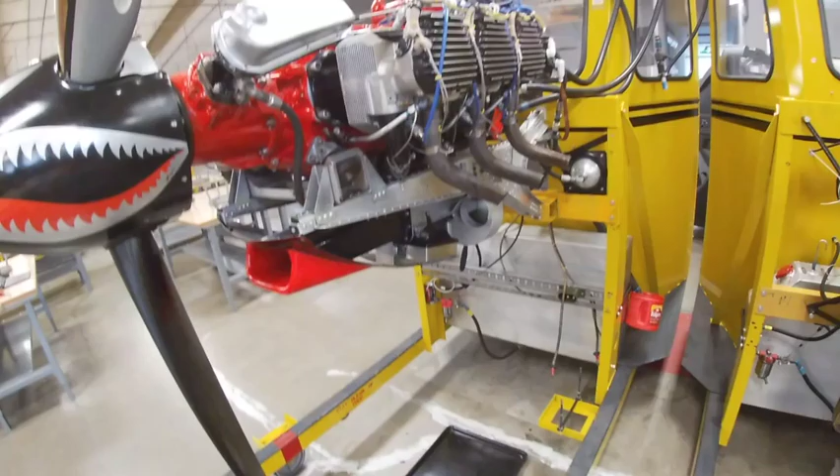Intake systems, you love them or you hate them, or you're indifferent, which I suppose is fine too. We're going to look at two different engines that are approaching the same challenge, but in slightly different ways. We have the O-300 and our IGSO-480. So we'll start over with the IGSO-480. Remember, we have four primary components to any intake system.

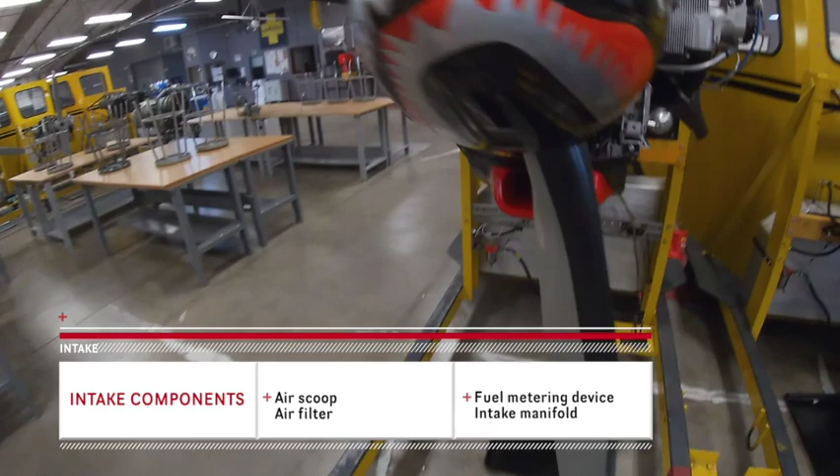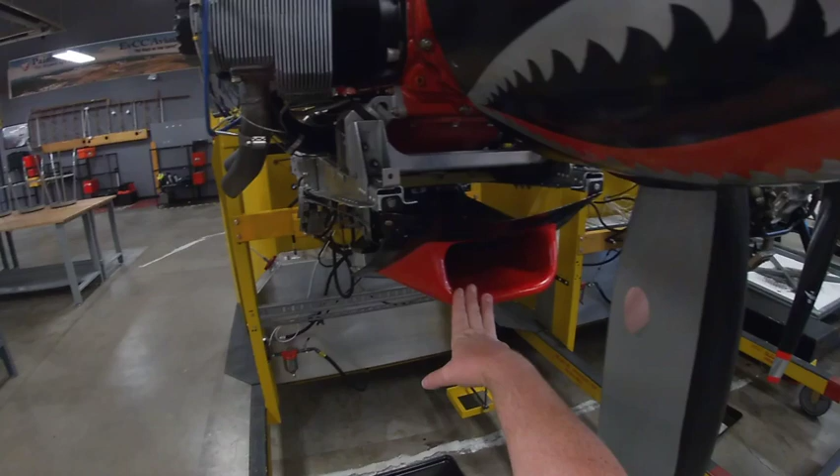We have our air inlet up here, which this one is designed pretty nicely. The shape of this actually allows us to take advantage of ram air when the aircraft is in flight to produce higher intake manifold pressures, which is kind of nice. It's a little bit like boosting without anything that needs to boost. This is supercharged, so it's probably irrelevant anyway, but it's a nicely designed air inlet.

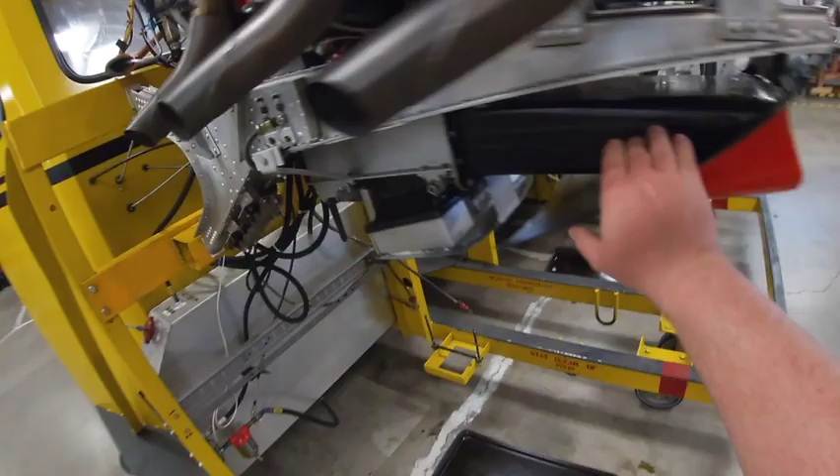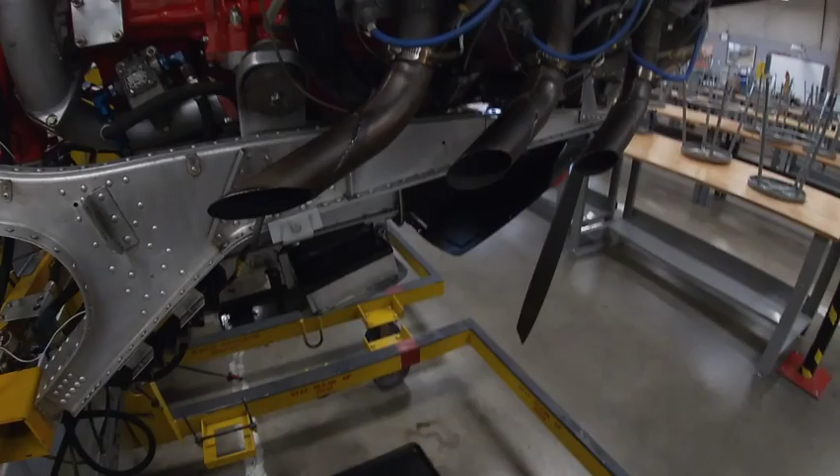And you'll notice as we come down our inlet further back through the trunk here, we're going to come to this bend right here, which goes up to our throttle plate. That throttle plate is going to be the entrance point, technically speaking, to where our intake manifold is. Now, we have a couple different things. We have our air inlet, but we're missing a fuel metering device, and we're also missing an air filter. Well, we know where our intake manifold is, so where are the other two? Well, there's kind of a difference about how they build this engine.

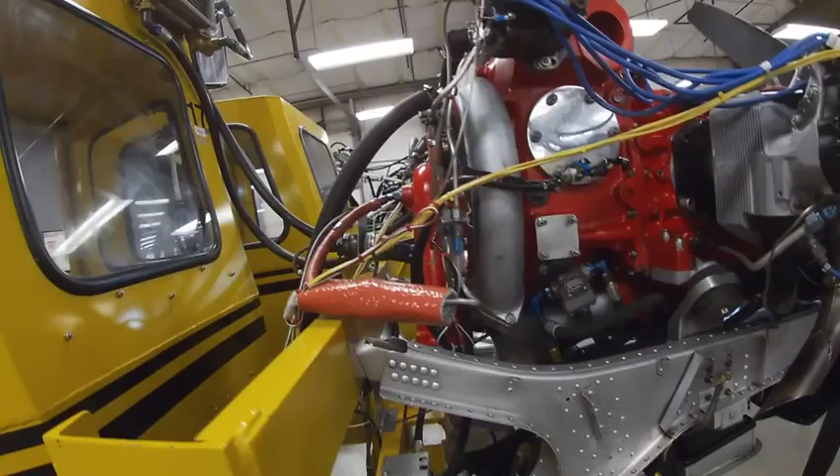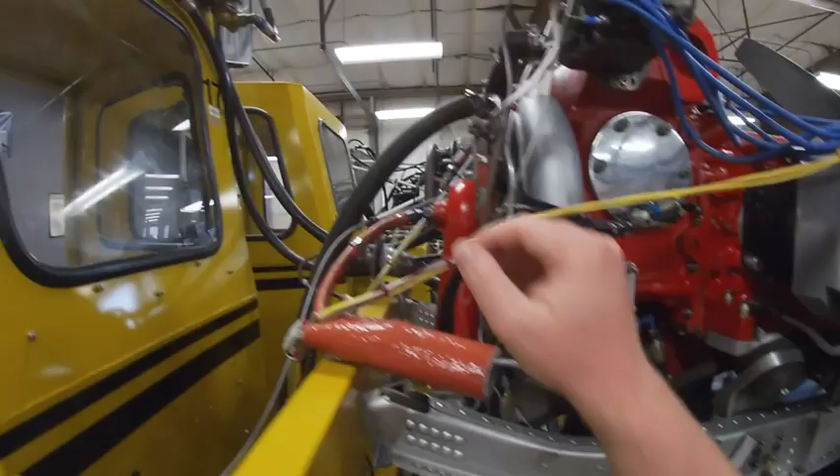So first of all, let's look at fuel distribution or fuel metering device. In this case, we have single point injection through a single injector, which goes into our supercharger section before this gets sent out to our intake manifold, and we have these familiar little 90-degree turn inlet pipes that go to the cylinders. So our fuel metering device is made up of a combination of this injection point along with our fuel servo on the other side that works in conjunction with our throttle plate.

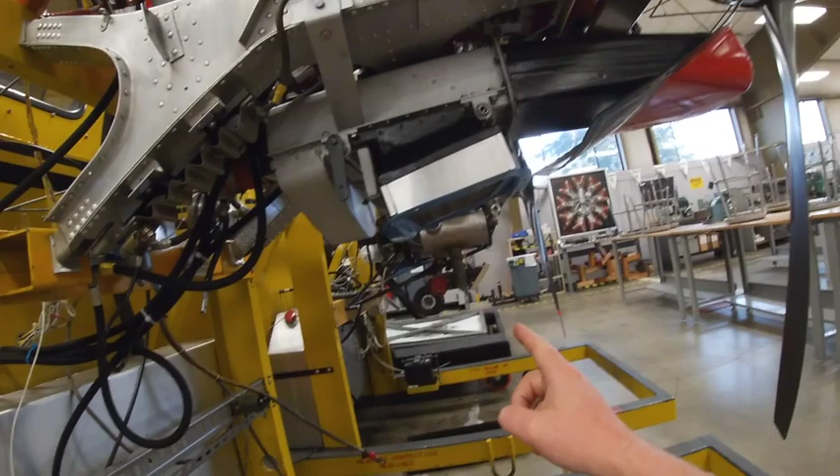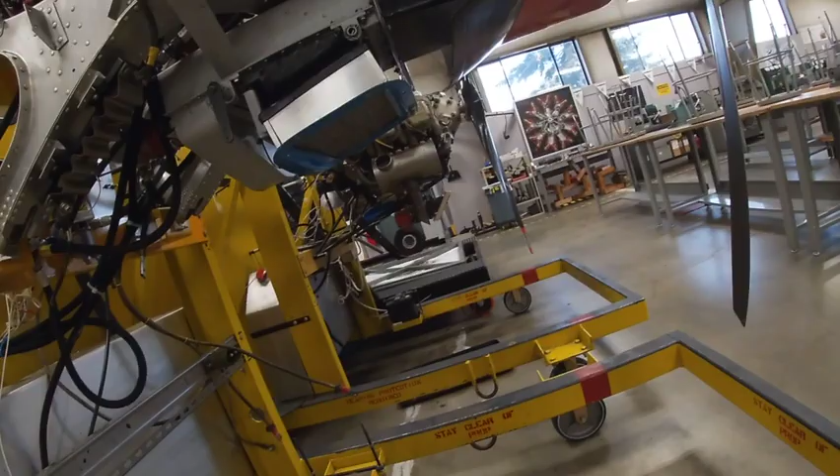Now the filter, this one's kind of tricky. Our filter is actually located right here on the bottom of the engine. And you may be thinking to yourself, well, that's weird. We already have a path going into the engine, so why in the world did they strap an air filter onto the bottom of this trunk? Well, I'll tell you why. Reason being is this does not normally provide filtered air while the aircraft is in flight. Presumably, the reason they've determined that is, well, the aircraft is flying through the air, so there's probably not a lot of dirt and debris and squirrels and other small animals that can get sucked into it when it's at 12,000 feet, so we don't need to worry about it.

So instead, what they've done is they come up with alternate filtered air. All that does is we have a control arm, which is linked up in the cockpit, so when the aircraft is taking off or landing, the pilot has the ability to switch to alternate air, which closes off the duct that's allowing ram air to come in, and instead draws filtered air through the bottom of the trunk and takes it through the rest of the system. That's one way of approaching it. Other nice thing about this is you don't have to really worry about filter ice while you're in flight because, well, there's no filter for what's normally being used in flight.

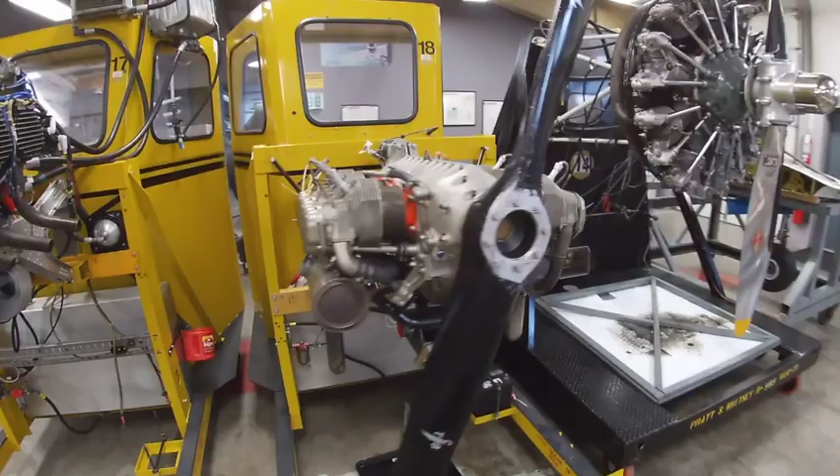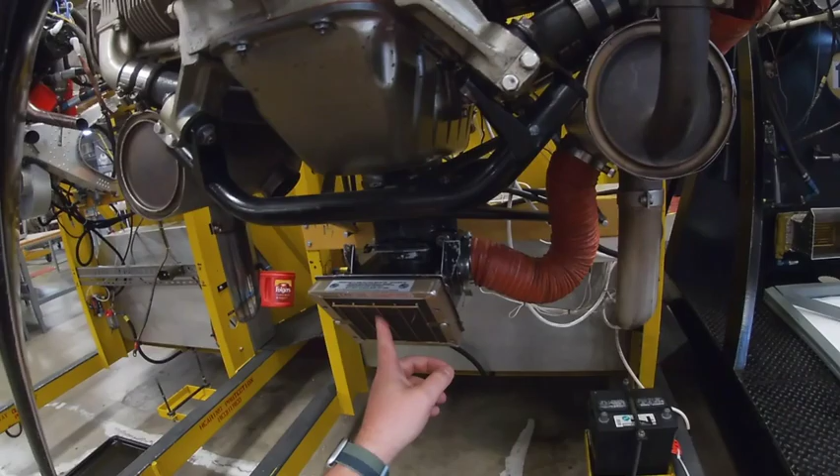Now on the flip side, as we go take a look at the O-300, this is a little bit more simplistic, but maybe in some cases hard to see. So we'll dive in and take a look. First thing to notice right here, we have our air filter right up front. This is a non-serviceable element. A lot of people remember these elements that could be serviced. You'd wash them out, then you'd re-oil them with a special kind of oil. That's not what we're dealing with here. It's not your car's K&N filter. These are designed to be replaced each time.

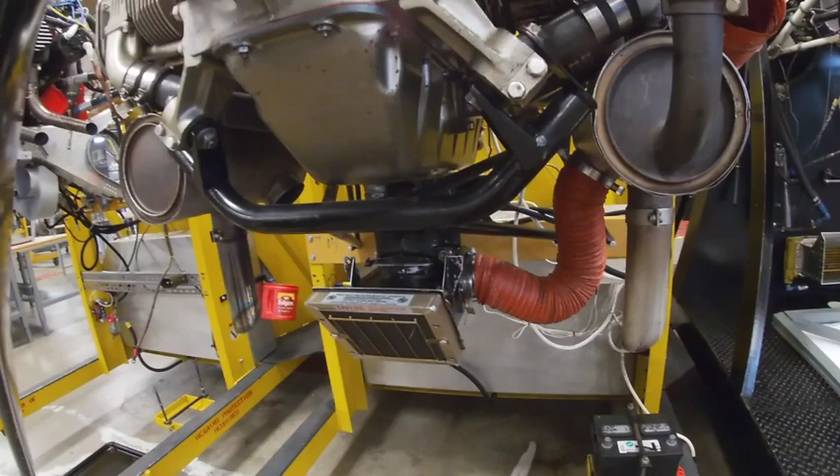Now, on the other hand, we have our carburetor box, which does a couple different jobs. Half of that job is related to carburetor ice, which we'll talk about in a minute here. But we have our carburetor right here, which is our fuel metering device. And you'll notice it's bolted right to the bottom of the oil sump. That can be a little bit confusing because you think, well, where's the intake manifold and why is this going into the oil sump? Well, the reason for that being is we actually have ducting that runs internally as a part of our intake manifold.

So we have our intake manifolds here, which connect to the cylinders. It comes up through a pipe, and it actually allows the warm oil to preheat the charge a little bit. Now, you may be thinking, oh, I thought you were just telling me how great it is to have cold, dense air.

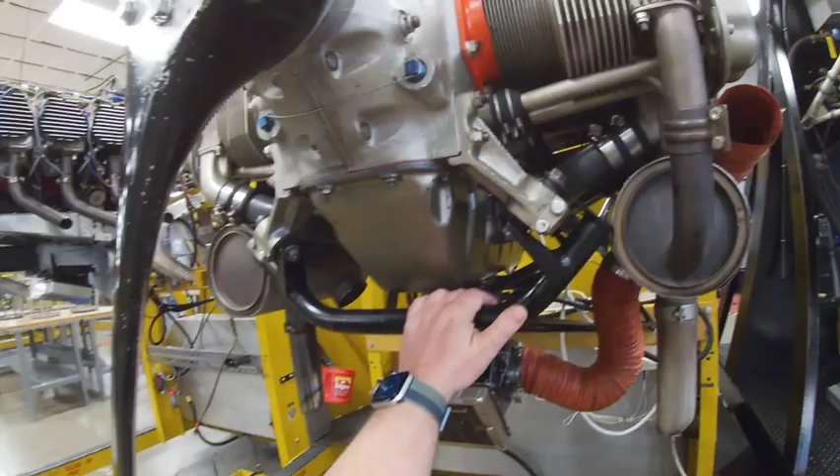Well, that's true. Cold, dense air is still the best thing. However, if it is too cold, then it actually makes it very, very difficult for the fuel coming out of this carburetor to emulsify in the airstream. So as a result, some manufacturers, you'll see this on older airplanes most of the time, will actually run part of the intake system through the oil sump to get some of that extra heat and to help the fuel and air to mix together so we have a nice, easy-to-use charge to promote burning.

And as we get up to our cylinders themselves, you can see that our intake manifold here connects to the cylinder by means of one of these wonderful little intake hoses. These will be the bane of your existence, mostly because of intake leaks. They can be notoriously difficult to get to seat properly to make sure that it's actually not on the wrong place, and they will cause leaks in your inlet all the time. They can be kind of tough to troubleshoot and figure out, so just keep that one in mind.

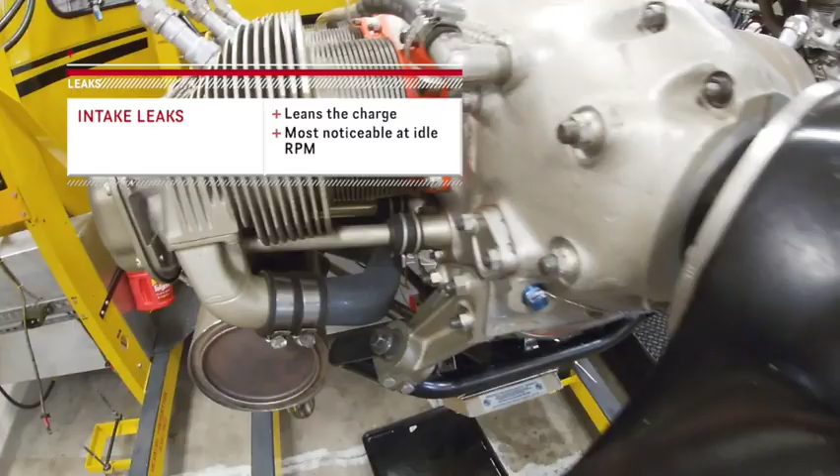Now back to the point about carburetor ice. Now we know that carburetor ice, we have a couple different forms. We can get impact ice that forms on the filter or filter ice, and then we get carburetor ice, which can form in the venturi of the carburetor. Basically, we have cold, moist air that's being taken in through the filter, gets up into a venturi, which drops the temperature further, and we introduce more liquid by means of fuel, which can cause us to start collecting ice. That is usually determined by a loss of performance on the engine itself.

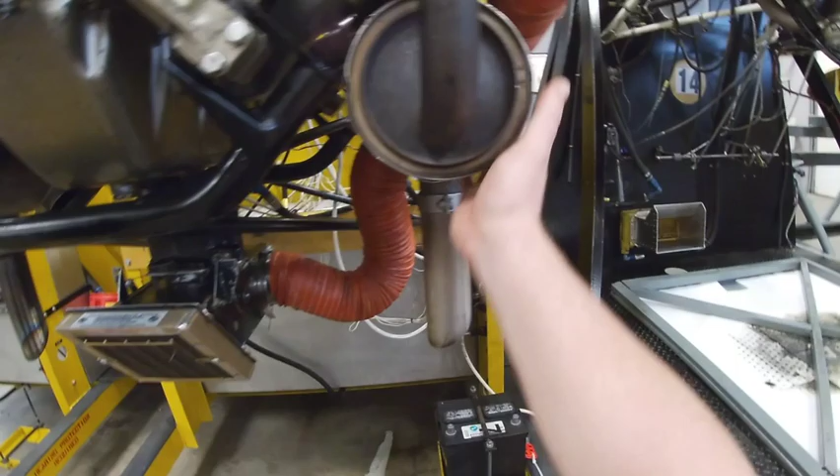So what we have is this little muff that goes around the muffler, and what that does is it draws in fresh air. It's forced around the muffler, and there's all these little fingers sticking out that allow for extra contact area to transfer heat from the muffler inside this muffler jacket or muff that allows the warm air to get warmed up, and it exits through this bit of scat tubing and takes it out to our carburetor box.

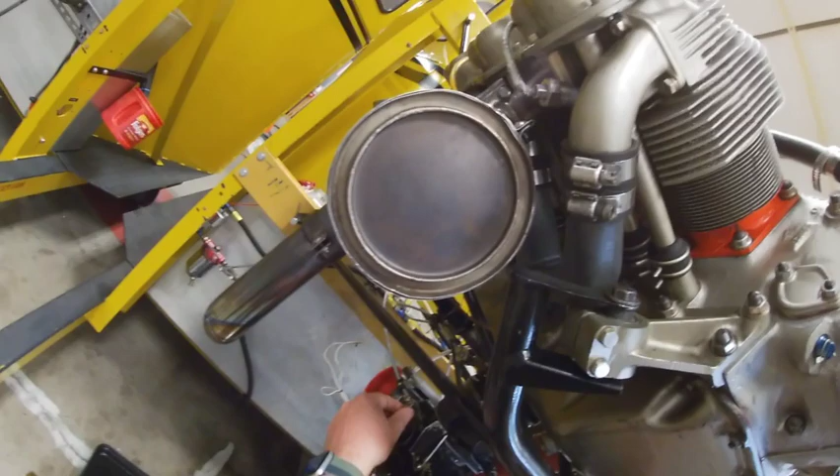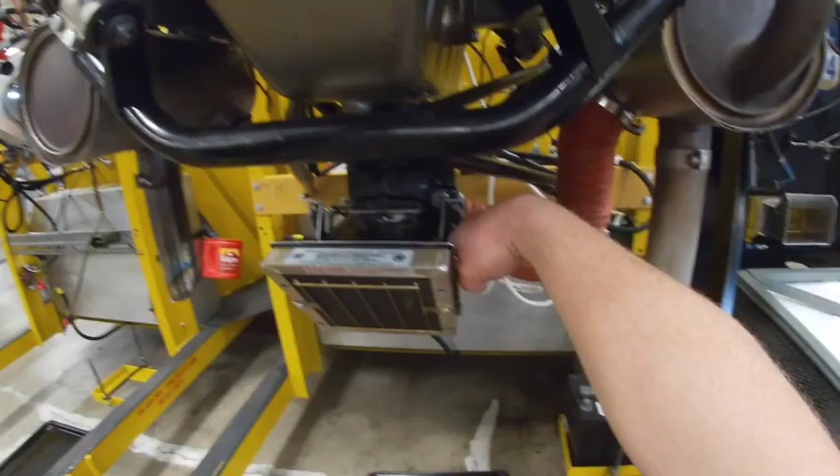The way that this works is we have a lever that's up in the cockpit that as that's pulled, it goes switch, which is probably a little bit anticlimactic from this side. You can see our lever right here. This will move back and forth. When it moves back, it takes a door, and it's normally horizontal, and it will block off our filter entrance right here, which forces it to draw air from this fresh air inlet out through here and forces warm air up through the carburetor, which melts the ice.

It is not designed to be run for long periods of time because long periods of operation can tend to cause overheating of our fuel air charge and potentially things like detonation and other unhappiness, but it will melt the ice over short bursts. And usually you can tell that you did have carburetor ice by the fact that you'll notice an improvement in performance once you return the carb heat lever back to its normal position.

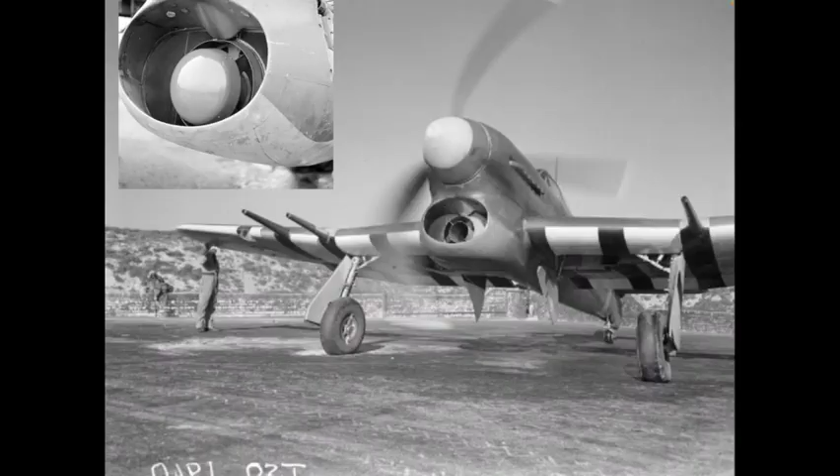Here's a couple of endnotes to supplement the video. So Tempest is probably as good of a place to start as any when we talk about intake systems. Part that's interesting about this is ultimately their idea of an air filter. So you can see right here this large open cowl where we have an oil filter or oil cooler and a radiator, but through the center is the intake to the engine, which offered some preheating to help with carburetor ice and that kind of thing.

But you see up here, this was an aerodynamic filter. I just point this out because it's kind of cool. You don't really see too many of these. The aerodynamic filter was effectively supposed to use airflow, since it had the oil cooler surrounding it, to prevent any foreign material from entering into the intake system, which is kind of cool as an aside, but it takes us into our conversation about filters.

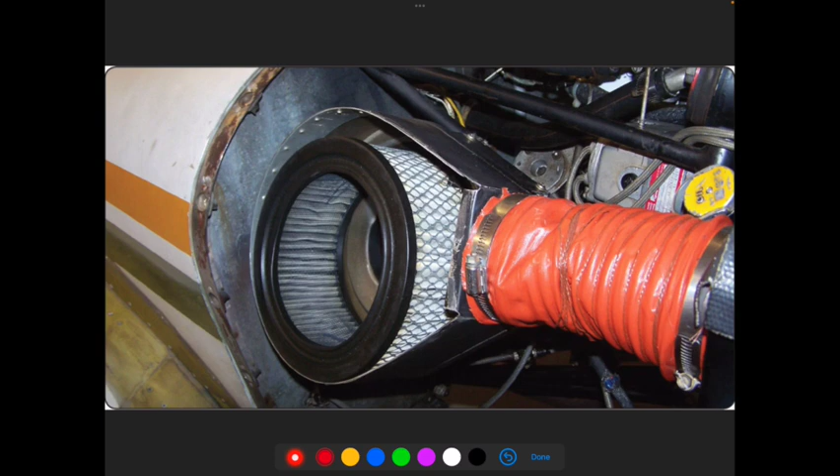A couple things to note when we talk about filters. There's three primary types that we're going to look at. What you see right here is a paper filter. Now, of the three types, two are technically speaking serviceable, one is not. With paper filters like this, it's going to be very similar to what you see in any automotive application.

You have a mesh liner on the inside right here, which is going to prevent these pleats from trying to crush or implode as they load up with material. It's pleated just like you'd see on an oil filter element to provide more surface area. And then this grating that you see on the outside is actually protection for the filter itself, and it also acts as an ice guard.

And effectively all that's going to do is cause ice to accumulate on those grated pieces before it accumulates on the filter itself, which is something we can see from impact ice. You'll see different variations of that on different filters, but ultimately, as we talk about the three main types, you're going to have the flock or cellulose.

Flock or cellulose is going to be serviceable, and it's serviced by flushing it with solvent, and then it's recoated with engine oil. Now, you don't see these very often anymore, realistically. They're pretty few and far between. One of the more common that you're going to see are paper filters. And when I say paper, it doesn't mean that it's legitimately paper. They actually have some new fiberglass constructions and things like that. But it's going to depend from manufacturer to manufacturer.

You actually can service these by blowing them out in the reverse direction with compressed air. So if you had a filter like this, you would actually blow air through the inside out to remove any material. And usually you get like 30 different uses that way, but again, it depends from manufacturer to manufacturer. And the third type that we talk about are foam filters. It's a polyurethane foam, and it's coated in a glycol material, which helps to capture dust.

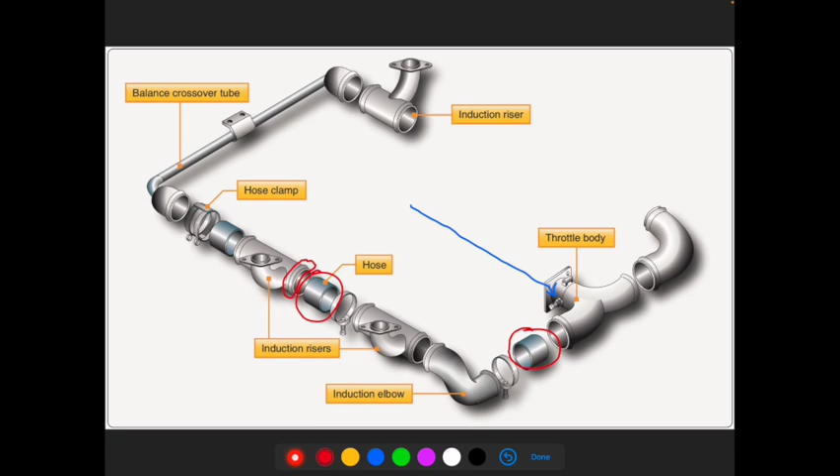And an important part to notice about this is you see these little beads that are depicted on the edges. Those are where our hose clamps are going to bite, and the positioning of the hose clamp relative to that bead is very important, because if it's not exactly in the right spot, it's going to cause issues. Now, this is not the most efficient form of induction system you're going to see. This would be typical on something like a Continental O-470, where we have a single point of entry. It's going to separate in two directions to service the banks of cylinders on either side.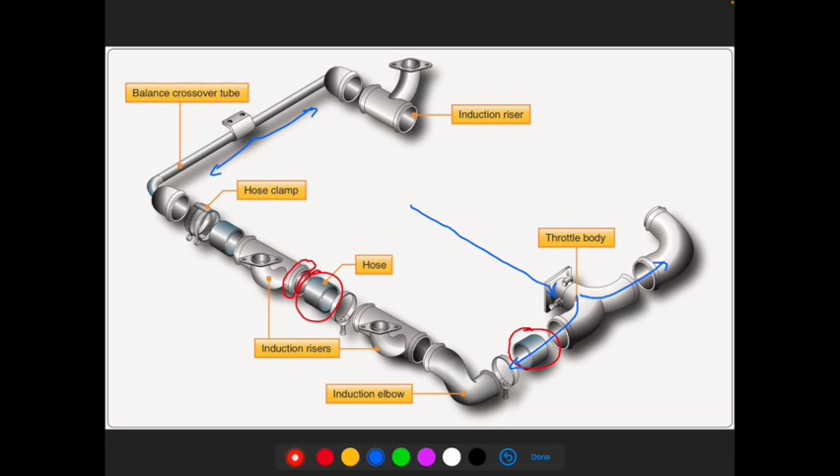And we put this crossover tube up at the front. The reason being is it gives us a little bit of pressure equalization. If we didn't have that crossover tube, then if there was one side or one bank of cylinders that was breathing a little more effectively than the other, then we would actually end up pushing more fuel air mixture that direction as opposed to the other, and we would considerably change the performance. So basically it just gives us pressure equalization between both sides, and that allows both banks of cylinders to be fed effectively and efficiently.

Now, on the other hand, we have a more efficient system. We would consider this a balanced intake manifold. And the idea with this is, as you can tell, instead of having a single point entry with two pathways to get to either bank, we actually have a single point that comes through our throttle body, and then right after the throttle body, it is going to head off to each cylinder. Effectively, what this does is it makes sure that each cylinder has a fair chance or an equal opportunity for fuel air mixture to reach it, which ultimately will provide us more balanced flow.

Now, this is going to change a little bit based on volumetric efficiency of each cylinder. And effectively, the more air a cylinder can draw because of good volumetric efficiency means it's going to get a little more fuel air mixture, as opposed to one that is struggling a little bit with volumetric efficiency.

And that's where things like our compression test can come in handy, because if we have a leak through the rings, then not only will we see lower performance due to lower compression, but we're also going to see lower performance due to a reduced amount of fuel air mixture that's being pulled into the cylinders. That can be kind of a challenge that we have to overcome.

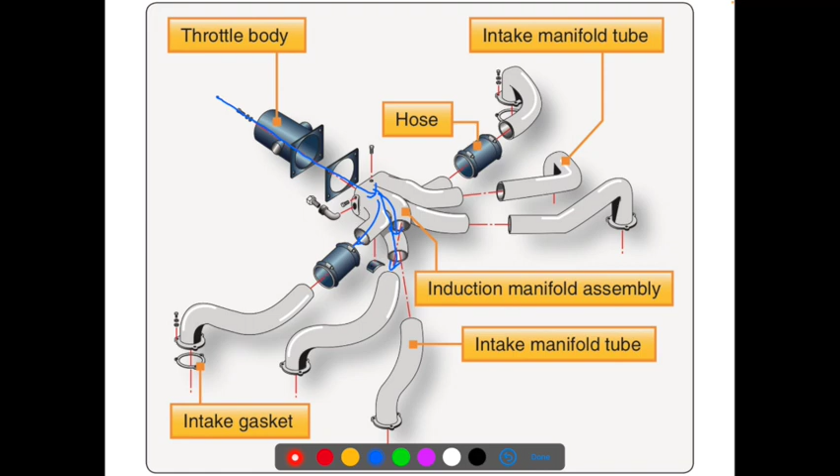Something else that's important to know is when we look at any intake system, if it's unboosted, naturally aspirated, really our throttle body acts as a cutoff point. So we have our throttle plate. Now, in most cases, if we have a partial throttle operation, then we're going to have an area of high pressure on the inlet side of the throttle body, meaning coming from atmospheric pressure or ram air, and we're going to have an area of low pressure inside the intake manifold.

Why is that? Because the throttle body is going to act as a restrictor, which means we have more pressure pushing on the outside of the throttle body. We're limiting or metering the amount of air that can move into the intake manifold, and that air is, remember, being sucked in by the cylinders. So whenever those cylinders draw air in, it's going to create a little bit of a vacuum.

Now, as we go all the way up to full throttle, that is the closest that the intake system is going to be to atmospheric pressure because that throttle body is wide open. But remember, the air is drawn into the engine ultimately by a vacuum being generated by the cylinders. So no matter what power setting we're at, even if it's full throttle, we're still going to have that area of high pressure outside, and that area of lower pressure inside the intake manifold, even if it's just by a little bit.

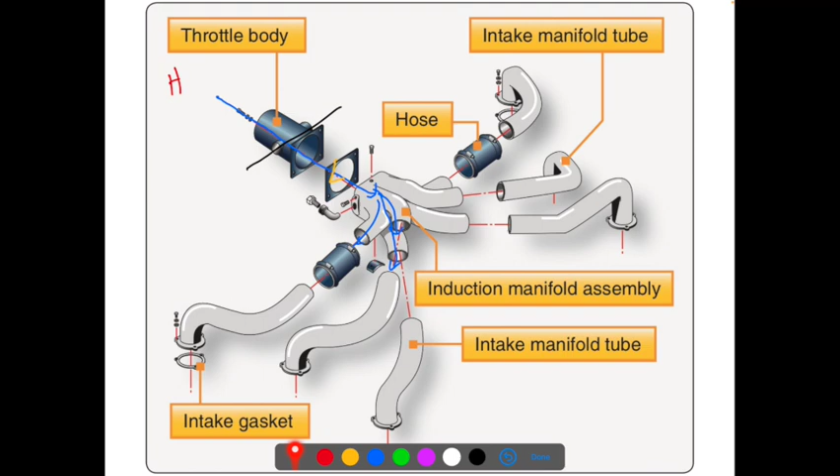Now, another piece that we want to talk about with intake systems is when we're dealing with intake leaks. It's important to be able to find these. Like I mentioned, those rubber hoses can be tough. If we have failed gaskets going into cylinders, effectively it's going to cause our mixture to be artificially leaned out. Because remember, our carburetor up here is scheduling an amount of fuel for the amount of air that's passing through or past that throttle valve. So if we open up a leak downstream, now we're adding extra air into the mixture for the same amount of fuel, which means we're going to have a leaned out mixture.

So when's this going to be most noticeable? Typically at idle RPM. You're going to struggle to get the engine to go all the way down to its idle speed. If your idle speed should be 500 RPM, it may want to sit closer to 600 or 700. Or if it's a really severe intake leak, you may not even be able to get the engine to start at all, or it may sound like you have a missing cylinder while you're trying to get that started up because there's just way too much air coming in, and we're already dealing with leaner mixtures when we're trying to start the engine. But that's the easiest way to troubleshoot that, is set the engine to idle and see where you're at.

If you're trying to figure out where the leak is coming from, a lot of times we can take some starting fluid or a little bit of brake clean and spray it in the vicinity of those joints where the intake tubes connect together, or around the cylinder heads where the intake attaches on. If you spray just a little bit of that brake clean, what we'll notice is it will get sucked in through the leak and be consumed as fuel, which means you're going to get a change in the tone of the engine, or a change in RPM when you spray that over a leak. So it can be a quick way to find leaks in a system.

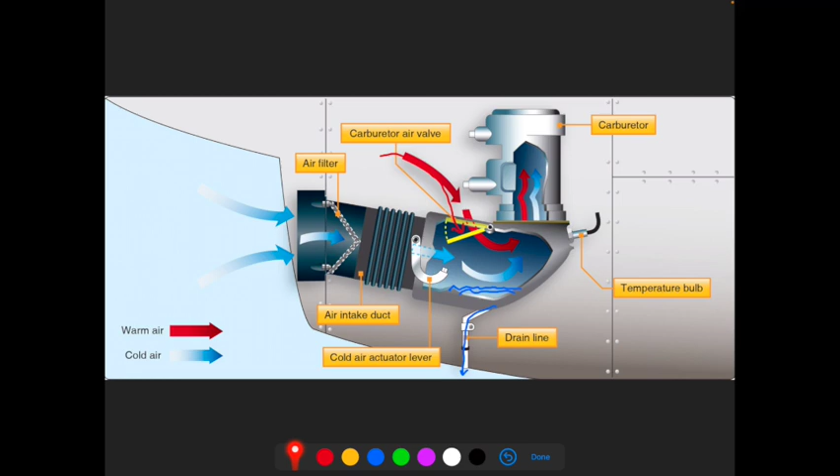The other component we have here, which is not on everything, is a carburetor air temperature. And basically that's just going to tell us what temperature the air entering the engine is, and it's going to give us some general idea of if the engine is going to be more susceptible to icing or not. And then, of course, we pass up through the carburetor. Now, as we talk about icing, we'll take a look at three primary types of icing that we tend to run into. The first up here is impact ice. Impact ice typically is going to affect either the intake just before the fuel metering device, or it's more likely going to affect the air filter itself.

This comes from having moisture present in the air. So if you're flying through rain, flying through snow, that ice is going to start to accumulate on the air filter, and typically it'll accumulate at a rate similar to what you'd see on the wings or other surfaces on the aircraft. The only way to do anything about this, we do have those guards on air filters to try to cause an area for ice to accumulate first, but ultimately if the filter clogs, then all we can do is rely on alternate air, which is typically going to be automatically controlled by means of a spring-loaded door.

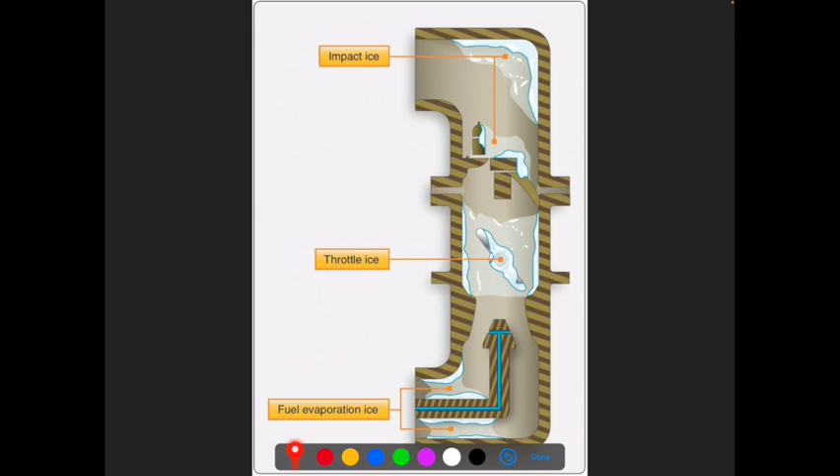The one that we see more often and is really concerning is throttle ice. Now, throttle ice is something that happens when we have cold, moist air flowing in through a system, and because we have a Venturi effect of air passing between the side of the throttle body and the throttle plate itself, we're going to get even colder temperatures, which can cause ice to start to accumulate on the throttle plate itself. Now, again, you're going to notice a loss of performance. This is really not something that we would distinguish from carburetor ice because this is all happening in the carburetor, but ultimately it's going to cause diminished performance because of diminished airflow, and it can get more and more severe to the point where it can actually jam the throttle in a single position, which we can only rectify using some kind of anti-icing method.

The third kind we see is a little more tricky because we don't necessarily have to see moisture present in the air for this to become an issue, but it's evaporative ice. Ultimately, what happens is as fuel is injected into the airstream and collects or swirls with the air that's coming through the throttle body, we're going to see that fuel diminish the temperature. Ultimately, we want liquid fuel to be completely atomized or emulsified into the air, and as a result, we're going to see the temperatures drop even further.

So typically speaking, we can see carburetor ice form on a relatively humid day in temperatures all the way up to 70 degrees because of the temperature drop that we see through this entire throttle body system. Now, one of the causes of this, like I said, is typically going to be relatively high humidity because the moisture is present in the air and we drop the temperature.

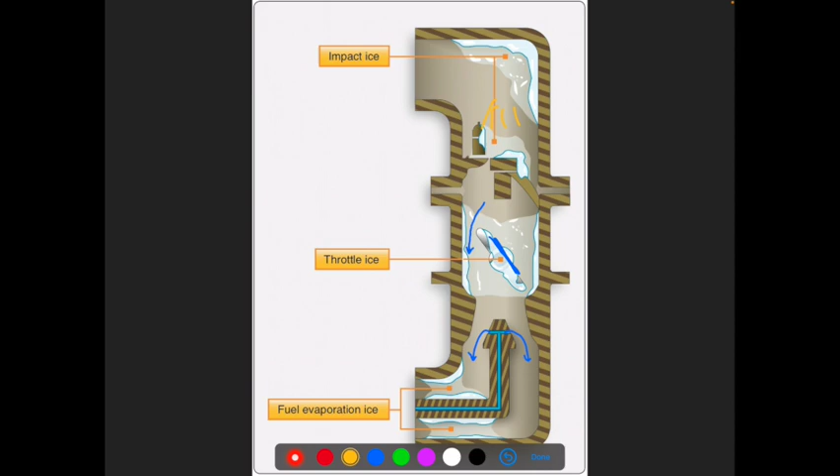Also in flight, because carburetor heat is going to significantly heat the charge that we have moving through this system, we want to make sure that we use it only long enough to melt the ice. If we use it too long, then it's effectively going to change our mixture. We can lead to situations like detonation, knocking, all kinds of problems we don't want to have. So only use it long enough to melt the ice and avoid using it on the ground.